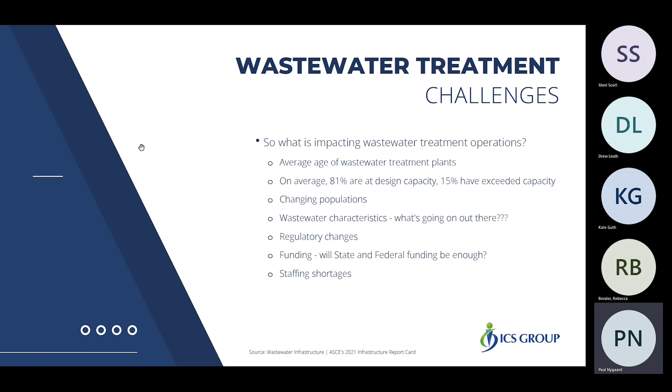One of the big questions is how do facilities manage more with these limited budgets, challenges and resources? We're going to talk about that a little bit. Is there a way to do more with your existing infrastructure? Do we have to go into a full-blown plant upgrade or expansion where we're adding physical footprint and tankage, increasing capacity that way?

Or is there something we can do to improve or simply replace equipment that can help solve some of these problems? When we talk about the major issues in a plant, obviously CapEx and OpEx is the big one. How much money do we have to spend for an upgrade? What's it going to cost? Is it going to drive our operating costs up, or will we have the ability to improve overall plant efficiency with the use of the technology?

A lot of the things we're going to show you here—before we get into the discussion—we're going to specifically focus on the areas of collection systems, primary treatment, secondary treatment, and biosolids management, which are inherently usually the big problem spots and challenges for these operators in these facilities. You'll see a lot of technology we have to offer in the marketplace that can help address those issues without significantly impacting manpower and capital budget.

In most circumstances, if not all, this will have the ability to help them reduce their operating costs and improve their operations overall. That doesn't necessarily mean our solution is the only solution, but the discussions today will highlight what we can all be looking for as far as technology that might be a little bit easier to enter into the plant than doing something like a full-blown upgrade.

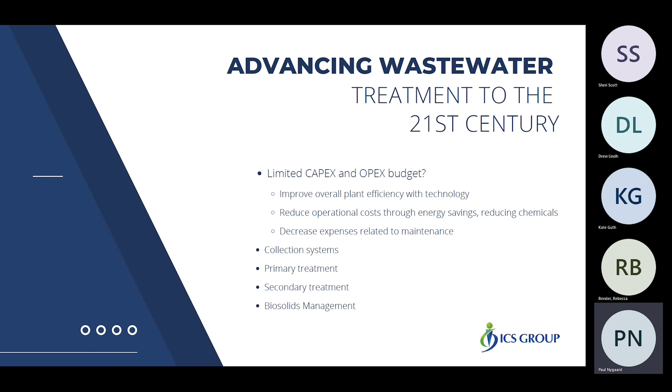So when we talk, we'll get right into collection systems, and the way we structured the presentation here is to start at the collection system, which is where all of our wastewater is getting collected, and then we'll funnel that into the plant and out the backside of the plant with the discussion points here.

When we get into collection systems, the challenges out there in that network are primarily related to the lift stations and mechanical equipment associated with the lift stations. We usually end up in a situation where a lift station has plugging and ragging become a big problem.

A lot of use of sanitary wipes and things along that line cause significant issues. Once you get a rag or a ball that starts to form inside the volute of a pump, if that thing doesn't get mitigated right away, it's going to cause imbalances, mechanical disruption, and plug the pump. Then the operator's got a challenge he's got to go out there and deal with.

Some of the other things in the collection system, FOG is a big one, where you get fatbergs and fat layers that start to develop on top of a lift station, especially one that has lower flow rates than a high capacity lift station. When that material sits in there for a while, it's going to start dealing with septicity issues. The FOG will cause that, and you get a biological component where you've got a lot of BOD and solids in that lift station.

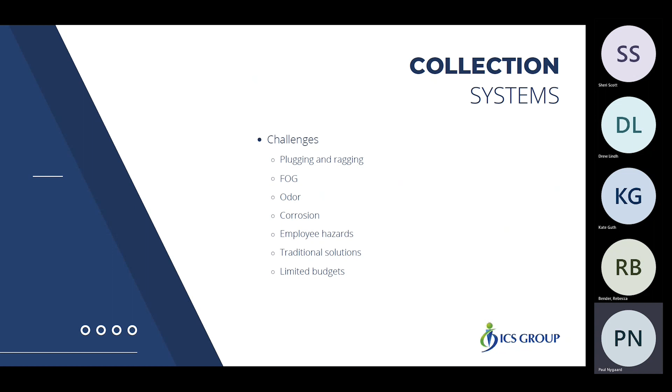It gets powered right from the control panel. We have CTs that we mount on the power leads that go down to the pumps. What that thing is doing is what we call real-time pump monitoring—it's looking at voltage and amperage of that pumping system, and it'll start to map the power usage curve.

So the first thing we do is make sure the pump is clean. That thing goes online and gets commissioned, and then it starts to monitor what's going on inside that lift station with the pump itself. As it sees an increase in amperage and a reduction in voltage, it will put that pump into a reverse cycle and kick that blockage out, effectively eliminating the potential for the blockage to even start. It also has the ability to monitor unbalanced load, so it can sense if the impeller's out of imbalance, or if we're having bearing issues within that lift station, which allows the operator to more effectively manage the lift station before something becomes a problem.

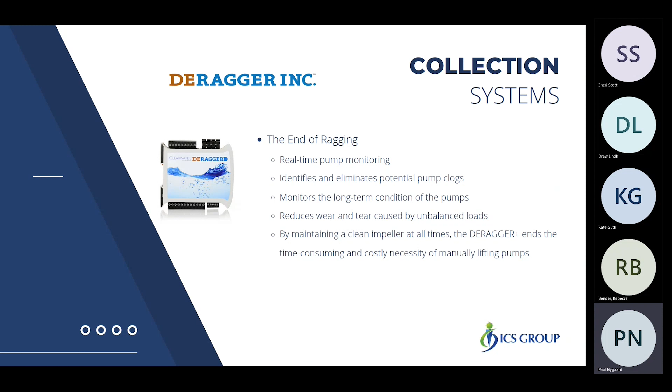The key is that trying to keep that volute and impeller clear of material at all times is vitally important, because that can significantly reduce the amount of maintenance and cost associated with dealing with the lift station.

Some of the benefits of this simple technology in comparison to the other ones I talked about, which are intensive and invasive, both from a manpower standpoint and also a cost standpoint: this eliminates downtime and other costs associated with pump ragging. It basically eliminates the problem, which reduces the safety risk to operators, and that's a big deal. These guys aren't having to go down in these lift stations or pull pumps up to the surface to deal with these issues.

We have the ability to put a cycle in where we can program this thing to do a purge of the lift station. What that means is we can get it to cycle the lift station, turn the pumps on, and draw the lift station completely down.

So if you've got a FOG layer that's starting to form, let's say you do that once a day, you're going to eliminate that FOG layer. If you're getting the FOG layer out of there, you're going to take away the ability of anoxic or anaerobic environments to develop, and you're going to significantly reduce the H2S generation potential of that lift station, reducing the odor being generated from it. The obvious thing on the mechanical side is it's going to significantly reduce lift station failures.

The technology is simple plug and play. All we need is one-line diagrams and information on the pumps, and this is usually a one-day retrofit. It can also, because we're closely monitoring power usage and reducing excessive loads, see sometimes up to 40% reduction in energy usage. That goes back to helping the operator reduce their operating expenses.

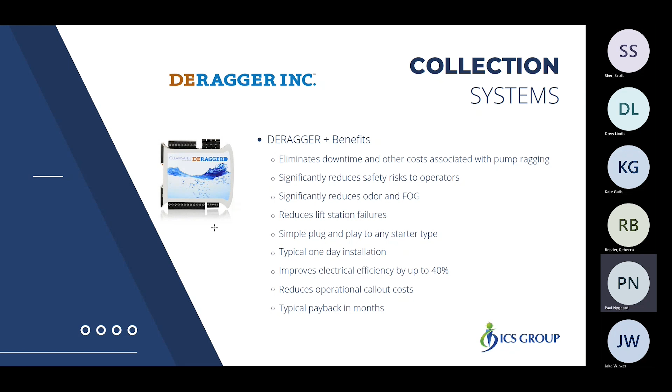Typical payback on this thing is usually in the range of less than a year. You can compare that to, for instance, a fine screen that might cost $150,000 to install. We can get into a duplex lift station for around 15,000 bucks and solve the problem in the same way. But then they're not having to deal with mechanical pieces of equipment in addition to the lift station itself. So some really significant benefits there that can help these operators manage things out in the collection system more efficiently.

So once we get out of the collection system, we get into pre-treatment, specifically primary treatment. This goes back to the issues of plant capacity. Plants are getting closer and closer to plant capacity. Traditionally, how do you deal with plant capacity? You go in and look at increasing tank volumes and increasing the physical footprint of the facility to handle more load and more hydraulics.

Plants can be challenged that way because of limited footprint. Wisconsin's a little more forgiving because a lot of these plants have fairly good access to surrounding land, but nonetheless, there are a lot of challenges even trying to get that permitted and get the availability of land to expand the plant.

Another big one is changing influent characteristics. As I said early on, one of the big challenges we're seeing right now is this is not your typical domestic wastewater anymore. You're ending up with a lot of weird chemicals and additional surfactant loadings. One of the big things with surfactants was during COVID, people started using a lot more soaps and disinfection products. That has created significant problems in wastewater treatment plants because they're dealing with surfactants.

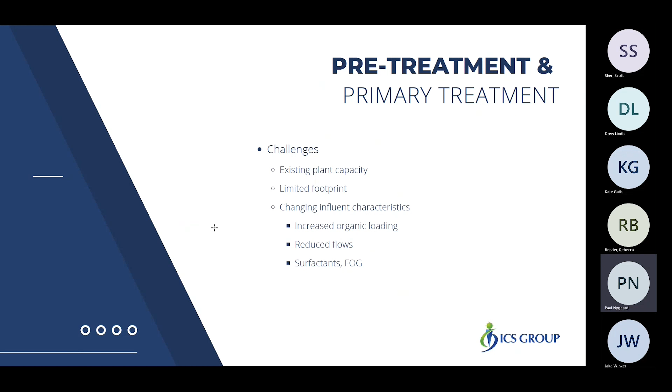And then, of course, you've got your industrial loads, especially from food production, where we get FOG loadings and things like that, which is also a type of surfactant. So one of the things we have is a technology that can help deal with that. Simple to deploy, we can pilot these things on site, and it treats the entire wastewater treatment process.

It's a technology called Moleaer, which is a nanobubble generator system. This is a really unique technology that has well-proven significant benefits in the wastewater treatment process. There's over 2,000 projects installed across multiple areas: agriculture, aquaculture, wastewater, surface water, oil and gas. What these nanobubbles do has a number of key impacts, but most importantly, it improves the efficiency of the overall wastewater treatment process by increasing the ability of the biology to go to work and break down the waste constituents more efficiently.

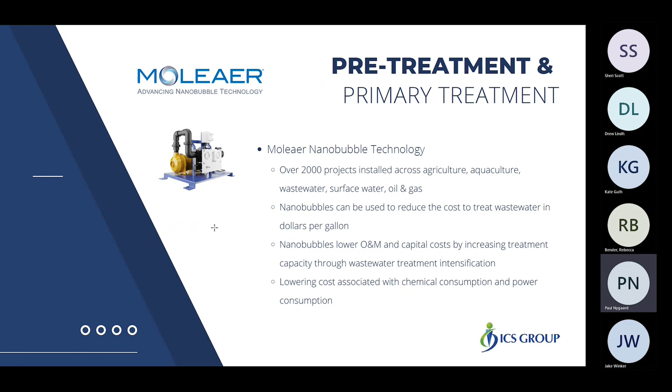So there's a lot of key benefits to this that we'll talk about here. We'll talk first of all about how it works in general.

This technology, because the nanobubbles are extremely small in size, as you can see noted here, they're about 100 nanometers in diameter. So we're talking about stuff that's viral cell size, very, very basically non-detectable by the human eye. Those bubbles have a very high electrochemically active surface, and they have high internal pressure. So they have no buoyancy.

So it's a Brownian thing where they carry, once they're injected into the wastewater, they carry through the wastewater column. So it's not like a dissolved air flotation system where the air bubble gets injected and then latches onto a piece of material and floats it to the surface. These bubbles stay in suspension throughout the entire process, from the front of the plant back through the secondary treatment process.

So what happens is that the surfactants, FOG, and all these different chemicals attach to those bubbles. And what eventually happens is the weight of that material collapses the bubble. And when that bubble collapses, it releases a tremendous amount of energy, which then disrupts the actual molecular makeup of these different chemicals, such as FOG and surfactants, breaking them down and making them more readily degradable from a biological standpoint. So that in principle is what it basically looks like.

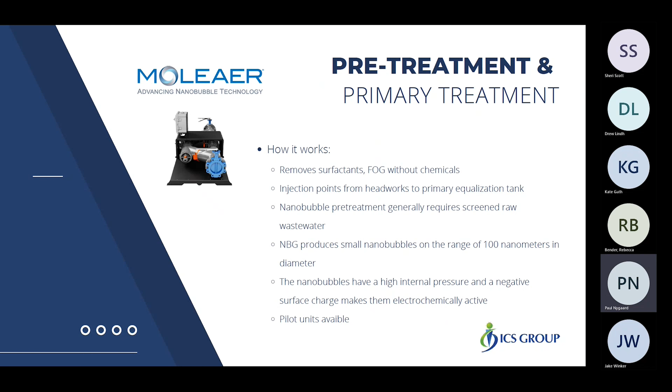Some of the benefits that have been realized, and these are well-documented white paper type stuff, independent studies, we've seen reduction in surfactants of 35 to 55%. We get a really big impact on TSS enhancement in the primary clarification and secondary clarification step, where we'll see TSS removals of 10 to 25%.

And we'll get 90% settling of sludge in less than 2 minutes in an Imhoff cone, which you can imagine is going to have a big impact on how that primary clarifier system is running at a plant.

And once we get the solids out of the way, now your secondary aeration process can operate more efficiently. And what we see there is a significant impact on the ability of the plant operator to reduce - we realize an increase in oxygen transfer efficiency, which then allows the operator to lower their DO set point.

One of the case studies we have, they were able to turn down their DO set point from 3.2 to 2.5, which resulted in a significant reduction, in actually them being able to turn off one of their blowers. So that had a big impact, going back to one of the key things we're trying to help with here: reducing energy consumption. So that's one of the big impacts of the technology.

Other things we've seen come out of the technology: it'll actually help improve sludge thickening and dewatering. That same application that I just referenced, they saw an increase in their dewatered cake from 12% solids to 17% solids. That's because you're getting that surfactant out of the way and converting it to a biological solid instead of that greasy, soapy material going through the system and ending up coating all the biosolids presses and things like that.

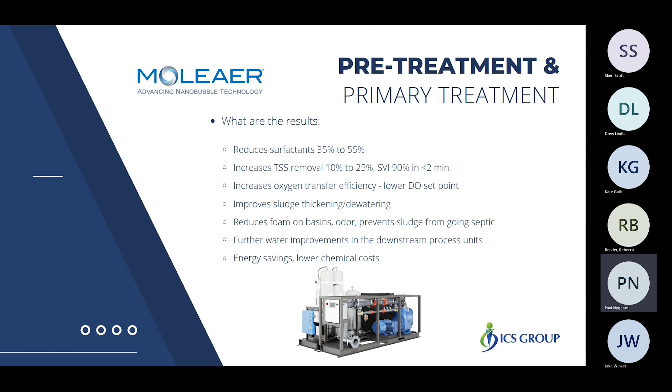Another thing we can look at when talking about footprint characteristics: let's say we have a plant with a capacity issue. We've got increased load, both hydraulically and biologically. They'll look at whether we have to expand, add more tanks, more clarifiers, more aeration trains, or is there another way to deal with that or repurpose those tanks?

That is where the Nuove Energie PrimeScreen comes into play. That technology is a primary treatment step. It literally can take the place of your primary clarifiers. So imagine a plant with 200-foot diameter primary clarifiers facing a capacity issue and looking at expansion. Instead of adding another clarifier or two, you can drop this unit in front of the clarifier, and it can take its place.

And then you can repurpose those clarifiers for, say, equalization. Or, one of the technologies we'll talk about further down, can you convert that to an aerobic basin and use that capacity to increase your aerobic capacity, if that's part of what the design expansion is going to require?

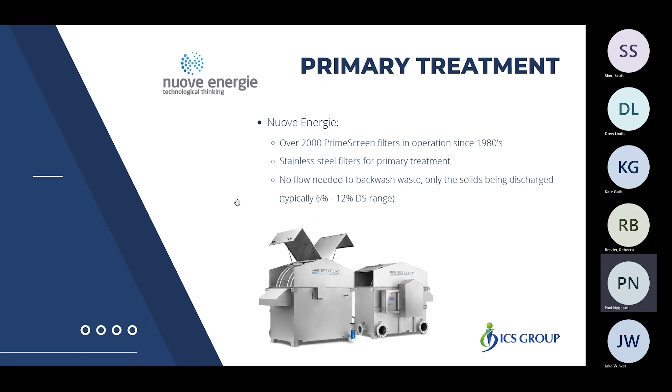I'm going to switch gears here and share another screen to show you a video, about a 1 or 2 minute video, that'll show this screen in operation. Just bear with me for a second.

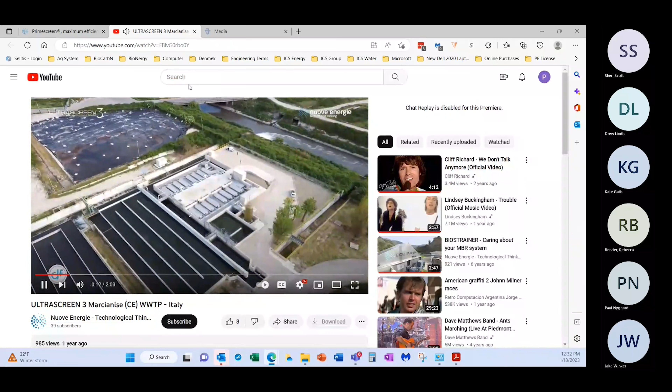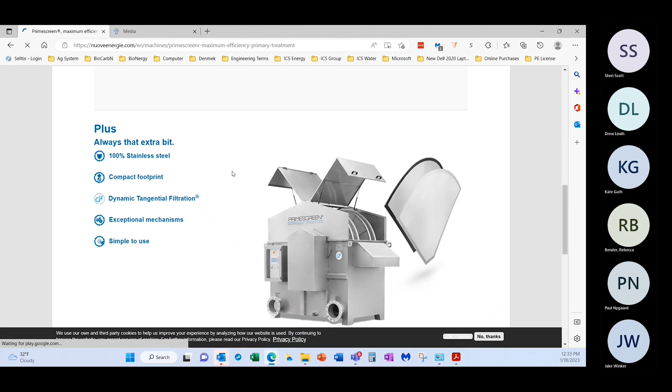We'll turn that on. I apologize, I grabbed the wrong one—I jumped to the wrong screen. Let me get this right, bear with me. It is not grabbing the right video. I apologize for that, let me just refresh here. There we go, now we got it.

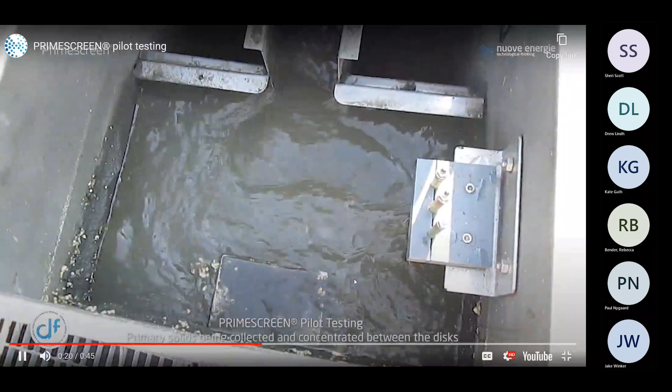Can you explain to us what's going on in the video, Paul? What's that? Can you explain what's going on in the video?

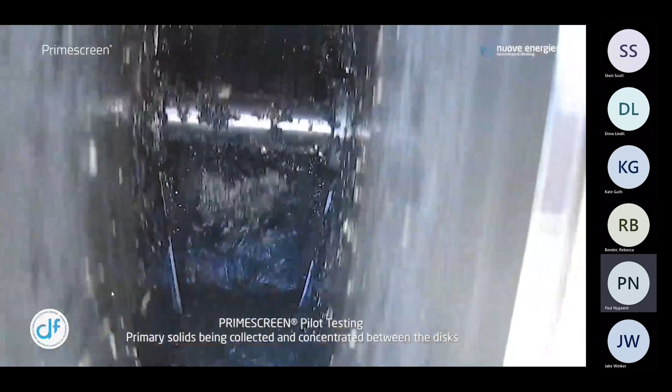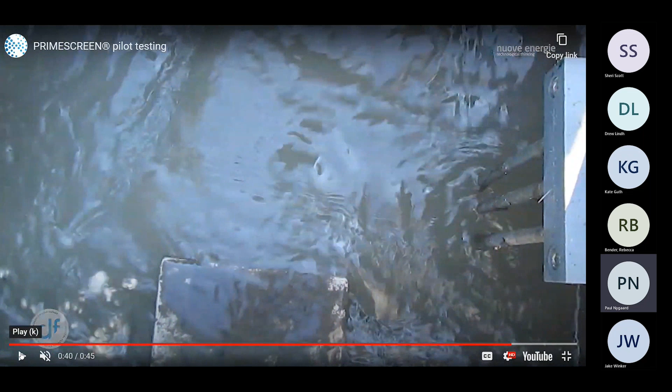Yeah, so what you see here is primary solids after headworks. I'll pause this real quick if I can get to it. This is the head box where your raw wastewater is coming into the unit. Let me go back and replay this so I can walk you through it with the pause button.

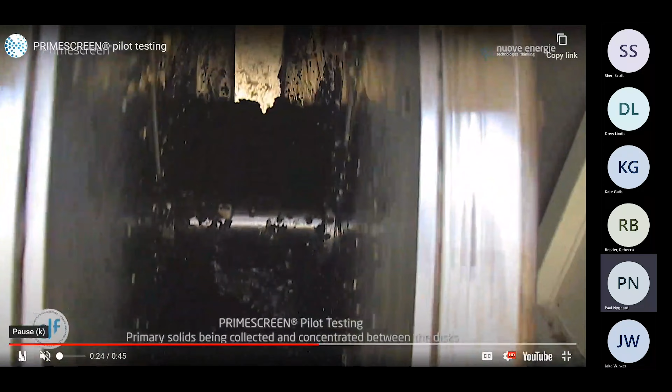These discs—the flow goes between the two discs, which are a stainless steel mesh that uses what we call cross-flow filtration. Once we get in between here, you can see that's primarily doing—these are the solids that would normally be captured by a primary clarifier. That's your influent level control on the right, and these are your primary solids being captured, which can then be slurried over to the anaerobic digester.

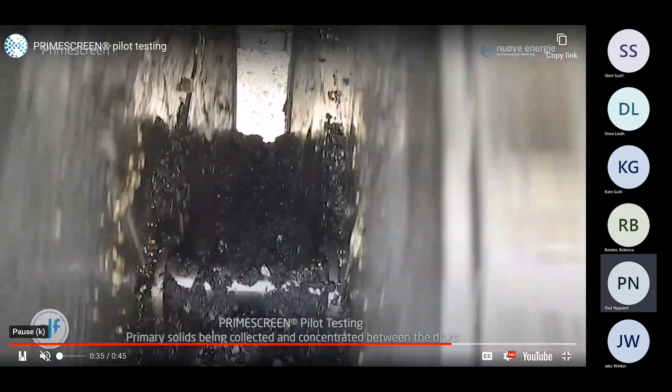All the maintenance is above the water line, which again helps the operator reduce operating expenses and issues associated with maintaining a system. So that, in essence, is what the Primescreen does.

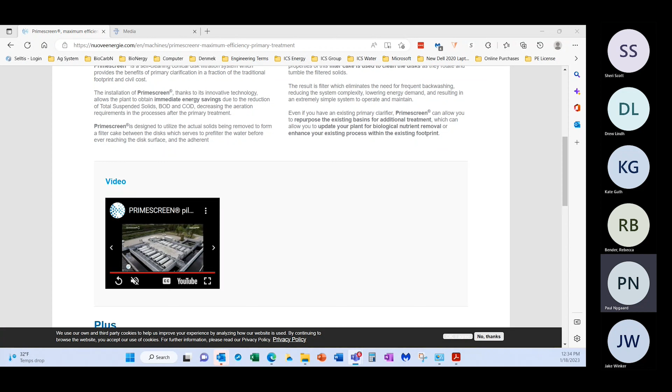So we'll go back to our presentation. The net impact of that technology is it can literally eliminate the need for primary clarifiers. Or if you have primary clarifiers and are looking to expand them, you may not need to, because we can replace the primary clarifiers with this technology, and they can be repurposed for things like equalization or additional aeration. We typically see 50 to 70% TSS removal and 20 to 40% BOD removal.

Again, the slurries can be sent right over to an anaerobic digester. The interesting thing I forgot to note when Kate and I created this presentation is this is literally 90% smaller in footprint than a primary clarifier. Our smallest unit, which can sit in a footprint about 8 feet wide by 16 feet long, can handle 3 to 4 MGD. So you can imagine how aggressive you can get here for an operator in helping them enhance plant operations, repurpose things, and get aggressive with treatment design to help them deal with existing infrastructure.

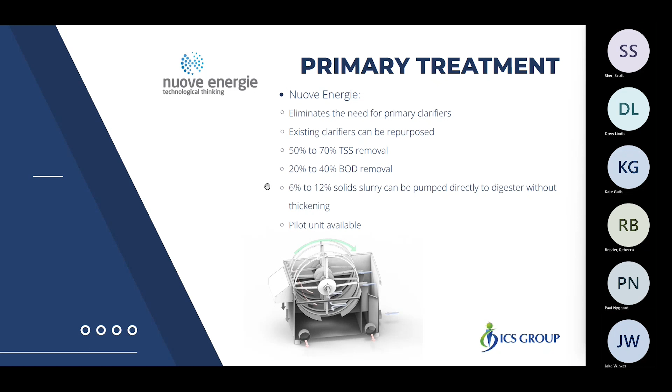So again, the benefits of this technology: it's high efficiency primary treatment. We can literally drop these into existing structures and channels, either as an in-channel structure or by pumping to them — so either by gravity or by force flow. They're extremely small footprint, yet completely scalable up to whatever size we need, going into the hundreds of millions of gallons on a system, and they're extremely easy maintenance.

The water level is always above this shaft point here, so the operator can maintain these discs above the water line. He never has to drain the tanks out, never has to do mechanical equipment repair below the water line. Again, going back to one of our themes here, how can we help these guys do more with less?

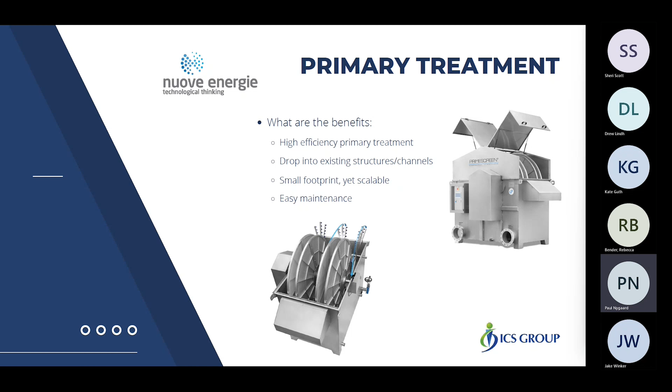One of the other things, obviously, with secondary treatment issues with expansion and the challenges is aeration. Traditional aeration has fixed grids on the bottom of a tank with typically 9-inch fine bubble diffusers, flexible membrane diffusers. The big issue is those things wear out over time. For the operator to do maintenance, the first thing he has to do is drain the plant down, go into that tank, and muck out grit or biological material that settled out — and then they're offline from a maintenance standpoint.

That's a big deal because it takes a lot of effort — they have to get that material out off the bottom, go down and repair discs and cracked pipes and things like that. These issues become more prevalent when existing plant capacity is getting maximized. How are we going to add more aeration capacity with a limited footprint when we can't look at adding basins? Changing influent characteristics can drive up the requirement for dissolved oxygen and more air into the system, which drives up operational costs like energy. Like I just highlighted, below-water maintenance is a real big one.

How do you visually inspect it to even know something's going on? Well, the way you start seeing it is you can visually see from the surface there's an area where maybe they have some diffusers out and things like that.

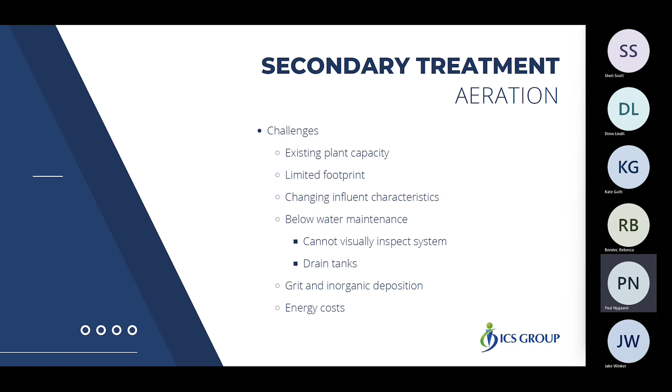Grit and inorganic deposition and energy costs. Aeration, in essence, is the biggest energy consuming point in a wastewater treatment plant. Going back to the discussion about surfactants, 40 to 60% of energy usage in a dissolved oxygen aeration basin, like an activated sludge process, can be attributed to the detrimental impacts of surfactants alone on oxygen transfer. So just imagine you get that surfactant out of the way, you're going to get somewhere in that ballpark of a 50% energy reduction. Then you couple it with this technology here that we have.

By deploying those types of diffusers, we can help the operator reduce his operating expense related to energy usage by somewhere between 20 and 40%, just by more efficient distribution of dissolved oxygen within the reactor itself. These things can be made from EPDM, silicone, polyurethane. Expected life is 10 years, which helps obviously with maintenance.

I'll show you some pictures here where we start looking at these basins open when they have all these diffusers. It can be mind-boggling, the number of diffusers that have to be maintained down there. So that's a big deal. And then just imagine when they start getting deposition of materials down there and they start to bury those pipes and diffusers, and then they have to go in and clean that. They've got to work all around those mechanical components. It's really labor intensive.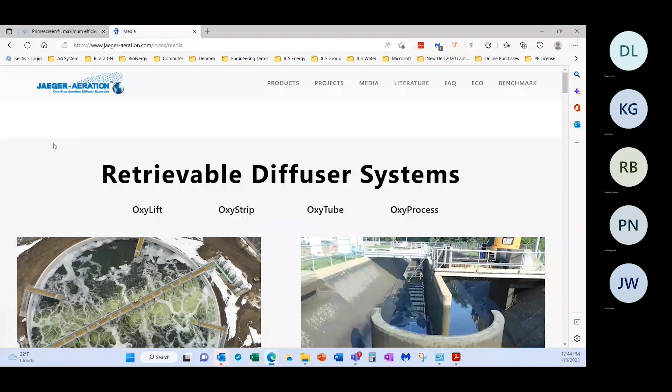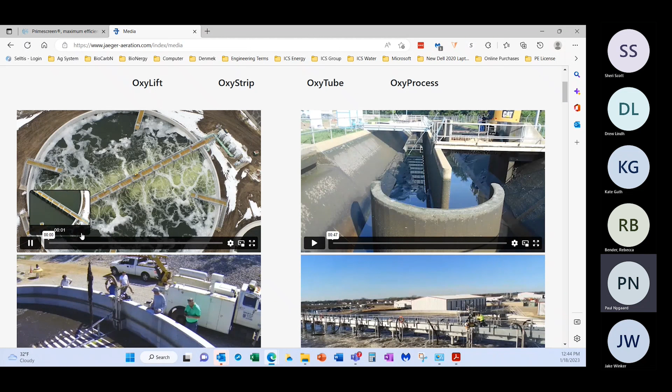So this is a circular reactor aeration basin. We can do these again in any geometry, and I'll show you some other examples. But this is a bridge-mounted system. We'll make this bigger so you can see what's going on here. They just turned the air on. I'll stop this real quick.

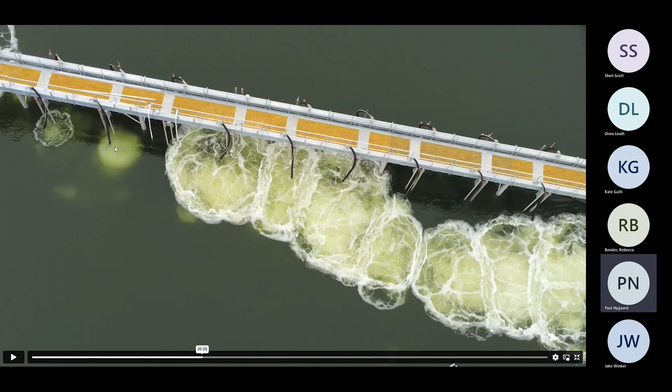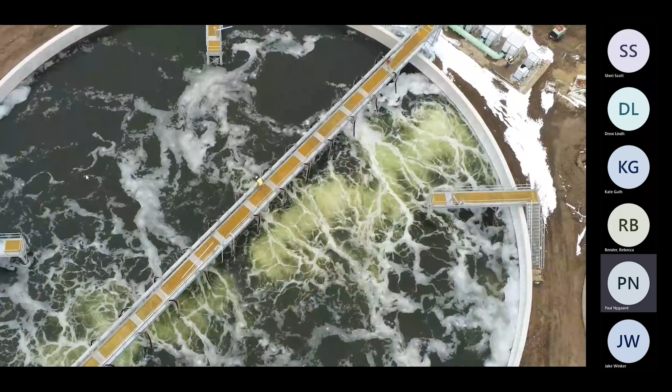This is very similar to a submersible pump system in a lift station on a rail. So these racks are down below, and you can pull these up to the surface on a rail system. That's where we get that feature of not having anything in the tank that needs to be maintained. On these piers out here are basically mixers getting a flow counter or clockwise. You can see the flow in the tank where we're getting mixing in the tank. So we're decoupling the mixing energy from the aeration energy, which has a big impact also on energy efficiency. That kind of gives you an idea of what that looks like.

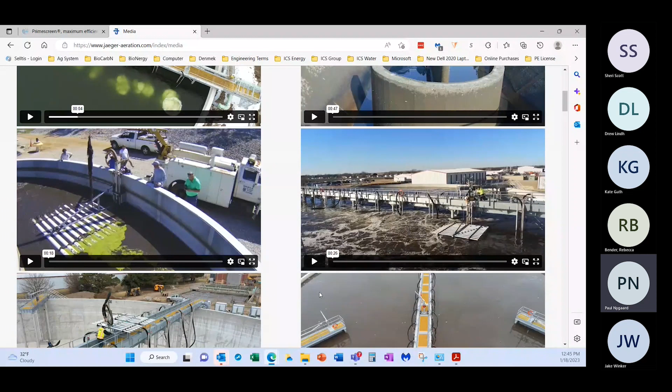Now what I'll do here is show you a couple videos of the actual rack on the surface. This will show you how it comes up to the surface.

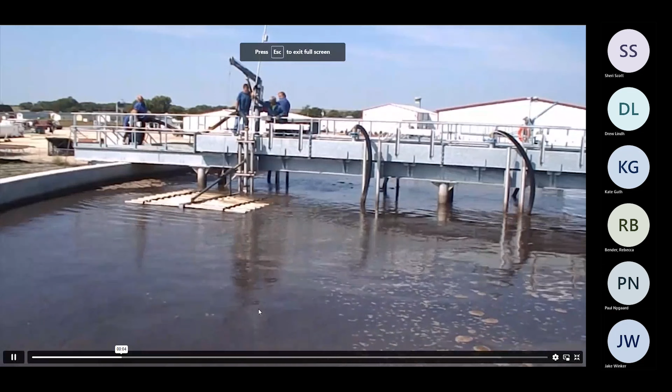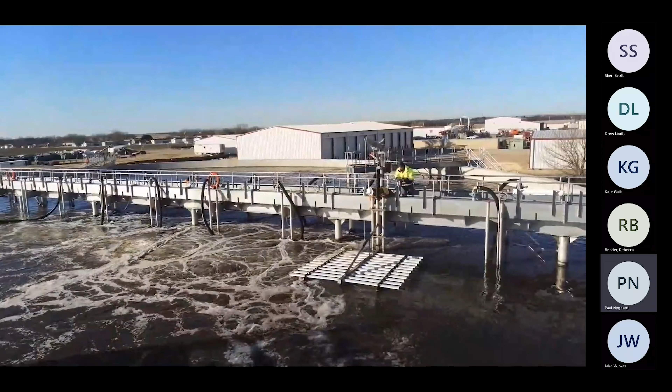They can visually inspect the membranes from the surface, hose them off, and make sure there's no biofilms or anything like that developing on the surface of the membrane. Then they can drop those right back down into the tank and go back into service. If they have to pull them for replacement issues, this is what that looks like. They can walk that right across that gangplank.

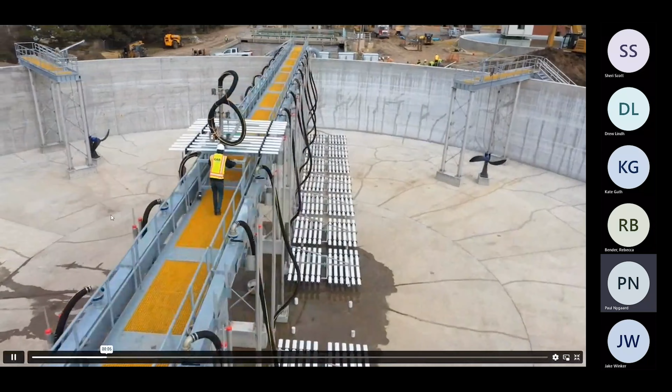You can see the banana style mixers here on those piers, and you can see the racks down below. This is sufficient to give enough dissolved oxygen to that entire basin. So, it's getting a little stuck here, I apologize for that.

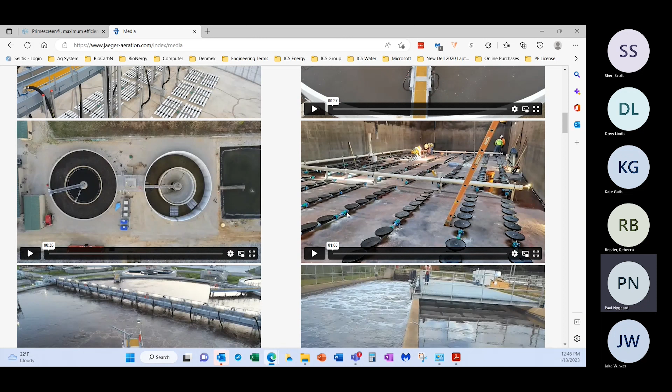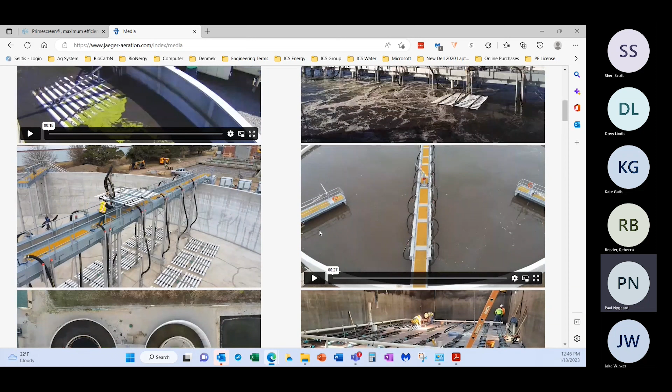All right, that's not gonna cooperate with me, but you get the point there. Again, this is what I'm talking about with fine bubble grids and the amount of diffusers. Now, Jaeger can supply diffusers and they have some really unique designs, but the really key thing for helping these operators with these challenges of maintenance, manpower, and energy usage are some of these retrievable designs that we're talking about.

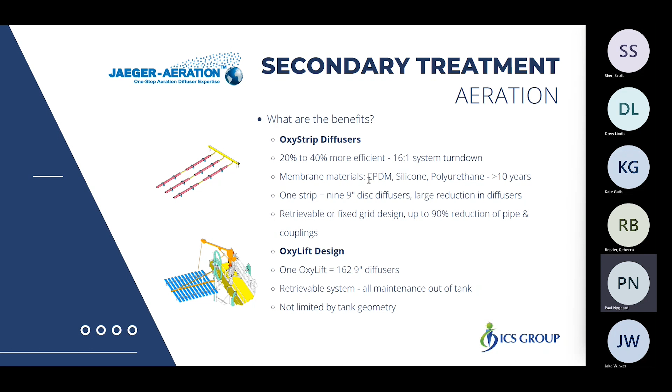So that kind of highlights, like I said, you can imagine how happy an operator could be if you could tell him you don't have to do anything inside your tank, which is the biggest tank system typically.

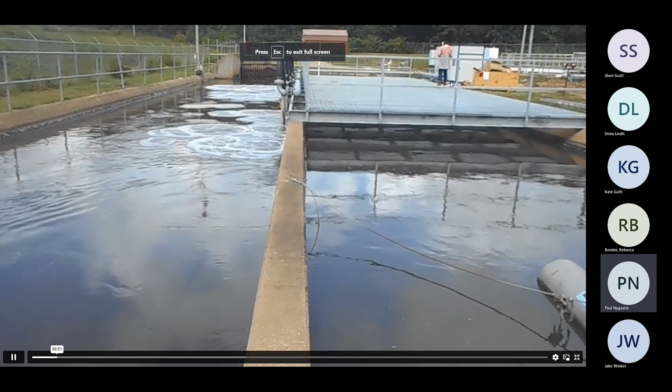So this one right here, this is an oxidation ditch retrofit. What we did is we put the aeration on one side of the chase, and then a grid over here where the operator has the ability to walk right out over one of the channels and go to the operational side. So then we have a series of mixers in here that are pushing flow through the system, but these are also on retrievable grids. So you can retrofit an oxidation ditch even in this particular type of design. So yeah, the tank geometry usually doesn't matter.

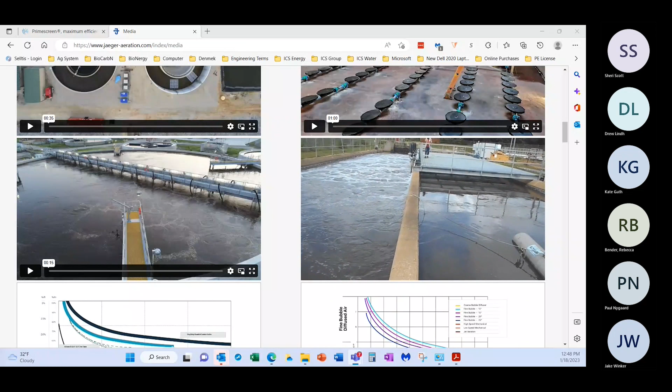Back over here. All right.

So when we talk about aeration, what you typically will see is there's a mixing component to aeration along with the aeration energy itself for dissolved oxygen transfer. Normally, those things will drive up energy usage. So if you can find a way to help the operator decouple his mixing energy from his aeration energy, that can also have a big influence on how big that aeration system is and how much horsepower you're pushing in there. Significant energy savings.

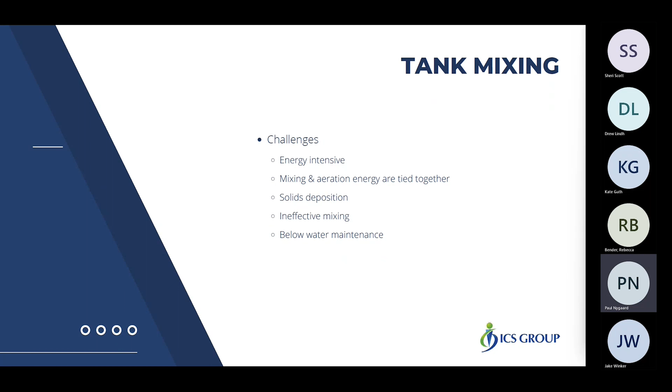So like I said, aeration can be energy intensive, especially when those two things are coupled together. Aeration fine bubble diffusers, just inherently by design, are up off the bottom of the floor. They could be a foot off the floor, which means you could potentially get solids deposition inside that tank. And it could be ineffective mixing, and you also potentially could have to deal with below water maintenance if you have rotating mechanical mixers in there.

And there's a huge energy reduction component to that, and it completely eliminates solids deposition. So you couple this together with the aeration design, there should never be an instance where you have to get into that tank to do maintenance or clean anything out of there. Which obviously is a big deal for the operator.

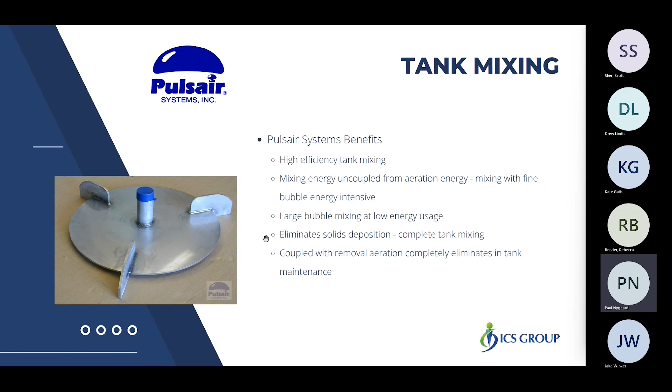And that is all stainless construction, really easy to deploy and easy to design. And again, big impact for the operator.

Then our last topic of discussion here is biosolids management. Obviously, this is going to become a more prevalent issue for operators, especially when we're talking about contaminants of emerging concern, such as PFAS and PFOA. We've got projects we've worked with where we've helped wastewater treatment plants deal with impacted biosolids, specifically when dealing with PFAS and PFOA.

So when you look at the challenges associated with biosolids management, one of the big ones is obviously changing regulations. There's more and more pressure now on land space. Operators are having the challenge of having to deal with limited land space, land being taken away, and it being more costly to rent the land or pay to be able to apply the biosolids to the land.

That such as landfilling and land applying restrictions. That's going to become more and more prevalent as we start to see more of these contamination issues in communities backing up and farmers backing up saying, I want you testing, and if there's stuff in that material, I'm going to start to limit you or completely eliminate your options for dealing with your biosolids. Because when you look at, for instance, in Wisconsin, a lot of biosolids are liquid land applied or cake land applied to farm fields, because we got a lot of wide spaces and things like that.

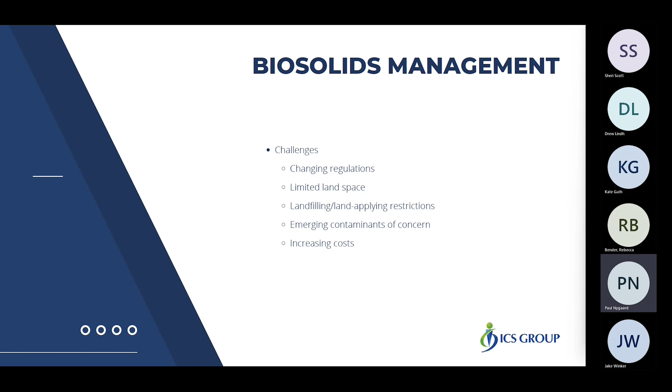That all obviously drives up cost as landfills start to restrict, land starts to get limited, the cost per acre starts to go up, and it becomes an operational challenge and an OpEx challenge. So you ask yourself, all right, what can we do to help those operators solve that problem?

So one of the technologies that a lot of people use are dewatering presses. You've got typical belt presses, screw presses, centrifuges, rotary presses, things like that. Those things can be highly maintenance intensive. They can use a lot of water, they can use a lot of energy, and they can be physically large in footprint. What you're seeing here in the picture on the right is our PW Tech Volute dewatering press.

That particular press is one of our projects we installed up at the city of Marinette, and we are processing 21,000 gallons a day at roughly 2.5% feed solids through that unit. It only uses, its footprint overall is about 12 feet long by 6 feet wide. And we only use about 5 horsepower total and about 20 to 40 gallons per hour of wash water.

It's fully self-contained and fully automated. So when these guys come in, they hit the start button and they walk away, and that thing processes. They'll let it run 5 days a week, 24 hours a day, fully automated. So again, we're helping them reduce their energy consumption. Their maintenance is extremely simple on this, and they don't have a lot of manpower where they have to babysit the system.

This particular technology, if you look at the other picture here on the left, it's got 2 screws on it. We can put up to 6 screws on a skid, which basically gives you built-in redundancy. So you can run 24 hours a day and you don't have the fear of something mechanically breaking down and all of a sudden you can't process your sludge. What that allows you to do is make the system physically smaller too. So that has a big impact for them.

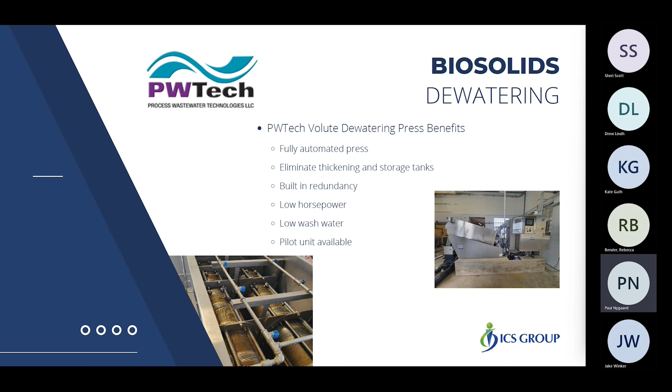So what they do here at this facility, because they have a PFAS problem, the cake discharges at roughly 22 to 23% into a cake pump, and then we take that over to a biosolids dryer, which is sitting right here.

All of this equipment was put into a footprint that was 15 feet wide by 55 feet long into an existing building. They came to us with a challenge: they said we have to fit it in this existing room. If we can't get in the existing room, the cost of the project is going to be too expensive because we're going to have to start knocking down walls, doing a big civil infrastructure project. We met the challenge and were able to engineer this and put it in an existing building.

So what this dryer is, it's a dehumidification system. If you look at the picture on the right, we're taking that cake and drying it to 93%, which gives them the ability to manage the volume of solids, because it's impacted - they only have one outlet and have to take it to a landfill literally out in the state of Oregon, believe it or not.

So they have to put this stuff on rail cars and it's got to be trained to Chicago and then out to the West Coast. They had to get their volume down because it would cost them a fortune if they were lugging around water in either cake form or liquid form, obviously.

So this technology was able to reduce the volume of sludge by 60 to 80%. Again, 90+% dry solids, significantly efficient from an energy standpoint, so low OpEx cost. It also gave them the ability to control their outlet of their biosolids.

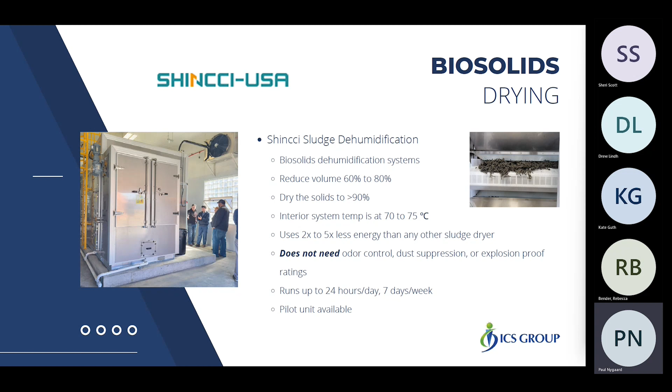This did not significantly increase the requirements of the plant from a manpower on a daily basis standpoint. I mean, obviously it increased some maintenance stuff where they've got to change filters and things like that, but in comparison to what they could have put in there, it's a significant advantage. Huge impact for the operator, solved the problem, but yet was very cost effective in doing so, and it didn't create additional challenges for the operator.

So to sum up here, our message to you today was: can we look for technology solutions to help aging wastewater treatment plant operators continue to meet their required regulations without breaking the bank, without overstepping the amount of manpower they have and creating more complexities in their operation? Can we help them improve plant capacity by simply adding technology instead of having these major expansion projects?

Assisting them in adjusting influent challenges and effluent regulations. Again, can we upgrade without having to do a whole plant upgrade? And setting these systems up so they can be as automated as possible, keeping that manpower increase down to a minimum for the operators so they can effectively still do their job - again, doing more with less requirements put on them.

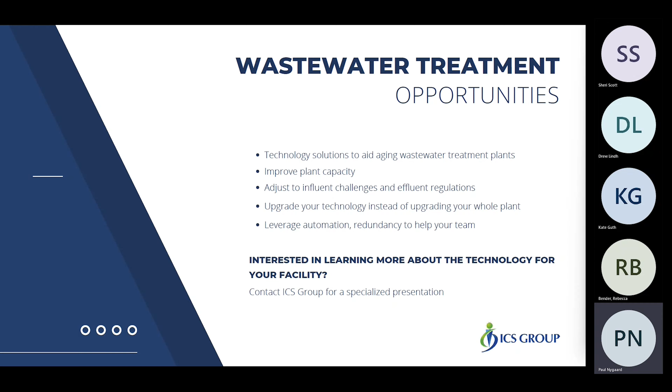So hopefully you got something out of this here, and it looks like I got us done right at the 1 o'clock hour.